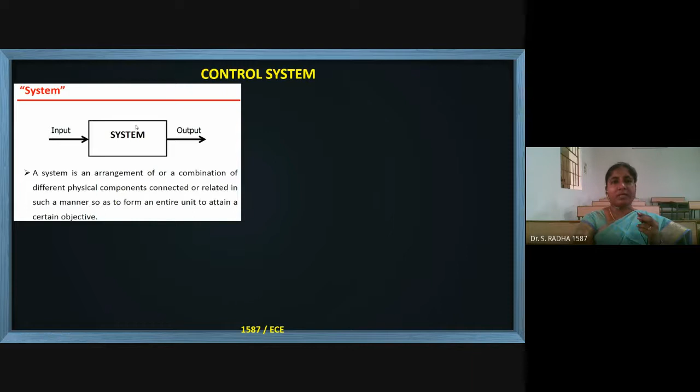System means, as discussed in the first class, a few components put together, joining them together to form a big equipment. Physical components connected together to form a bigger machine is called a system.

Input has other names: excitation signal, stimuli, or stimulus. Output is also called response.

If we see control, if we are regulating here in the system, input, output, system, all these things are there. When we call the system a control system, there should be some relation between input and output, and there is some control over the system. We operate the system in order to get some output. If that is done, then it is called a control system.

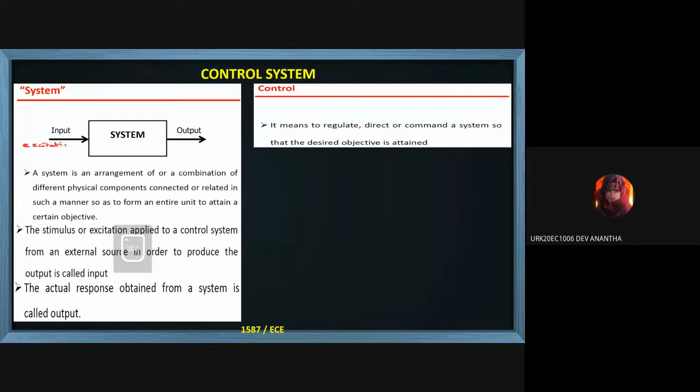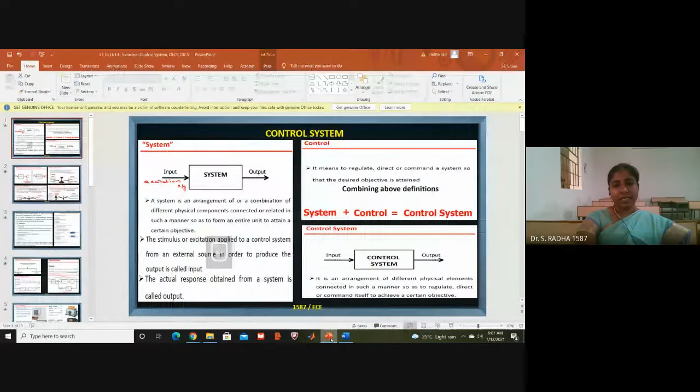The other name for input. Excuse me, ma'am, someone named Aminuddin is waiting outside, can you please allow him, ma'am? So here, no access for me. Kindly join with the Karunya mail ID and put your register number followed by name.

So the other name for input is excitation signal, and it is also called stimulus. Coming to the output, the other name is response.

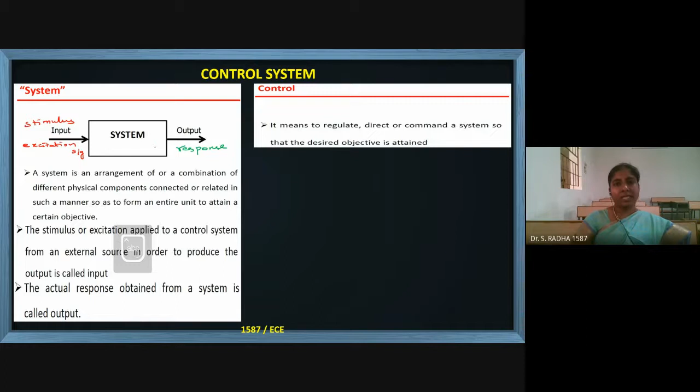If we regulate, if we do some control over this entire thing, input, output and system, controlling one and the other, then that phenomenon is called control. Combining the two, system and control, put together, it is called control system. It is an arrangement of physical elements where we regulate or command the system in order to achieve some objective.

We will have some objective, and for that purpose we will be monitoring or having control over the input and output. That is called a control system.

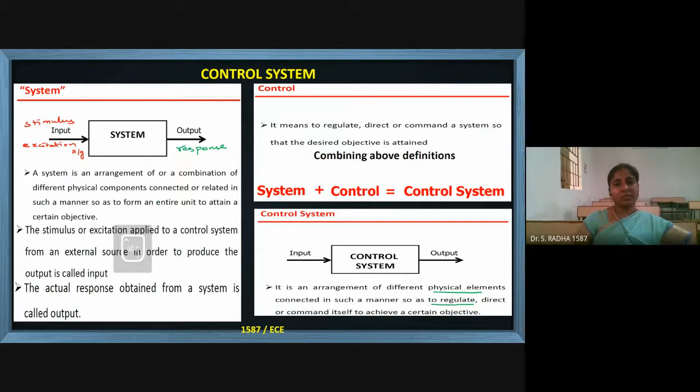Now coming to the difference between system and control system. A system will have some output, it may or may not be the desired output. So the system will give some proper output, but it may or may not be the desired output.

That is called a system. If the output is the desired output, then it is called a control system, because we are controlling, in order to achieve some objective, having some regulation over the input and the system to get the desired output, hence it is called a control system.

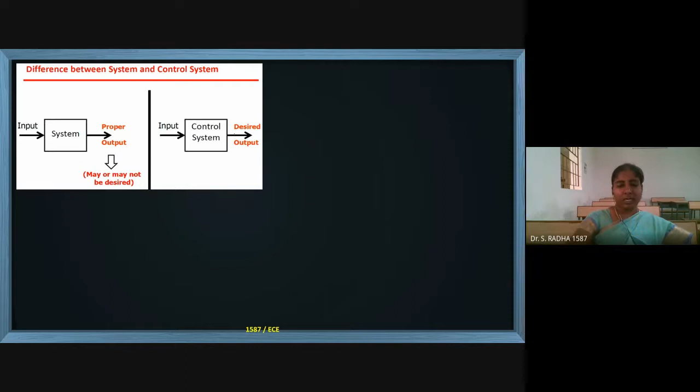If you see here, example: take a fan, and this fan is not having wings. In that case, our output is airflow. Without wings, there will not be airflow, and we are not getting either proper output or the desired output, and hence this cannot be called a system.

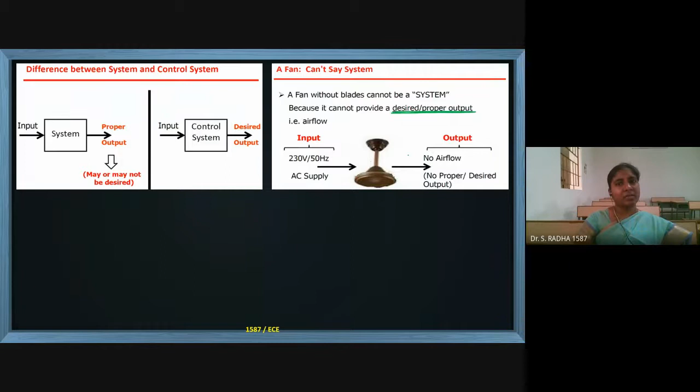There is a fan, but without wings there is no airflow, so it cannot be called a system because we are not getting either proper output or the desired output. Now take a fan with wings, like in the railway station, when you switch it on there will not be any control over the speed of the fan, since they might have fixed everything internally for a common setup particularly in railway stations.

Here, the fan is present with wings, but there is no regulator present. The fan is having blades, blades or wings are one and the same, but without a regulator. Regulator is to change the speed of the fan, switching from 1, 2, 3 up to 5; that regulator is not present here.

So the airflow is constant, constant speed, rotation of the wings, rotation of the blades. In this case, we are getting proper output, but particularly if we want to increase or decrease the airflow, that is not obtained. Desired output cannot be obtained.

In the second case, there are wings, but there is no regulator. Proper output is obtained, but it is not the desired output. In this case, it is called a system.

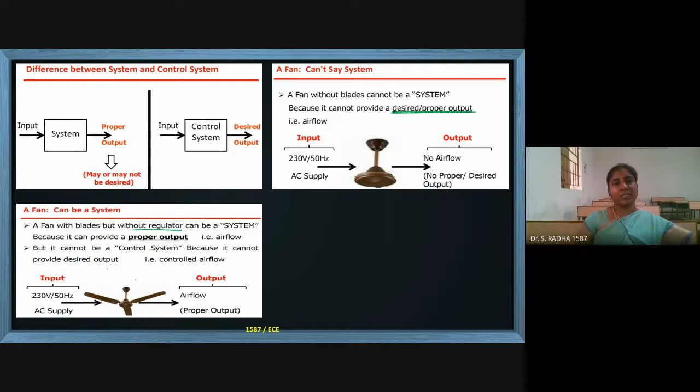Now, if you take the same fan with a regulator present, where we can change the points to increase or decrease the airflow speed or the speed of the wings, in that case regulator is also present, blades also present, desired output is obtained, and hence it is called a control system. We have seen three different cases: a fan without blades and without regulator, a fan with blades and without regulator.

Third case, we have a fan with blades and with regulator. These are the different cases in a system.

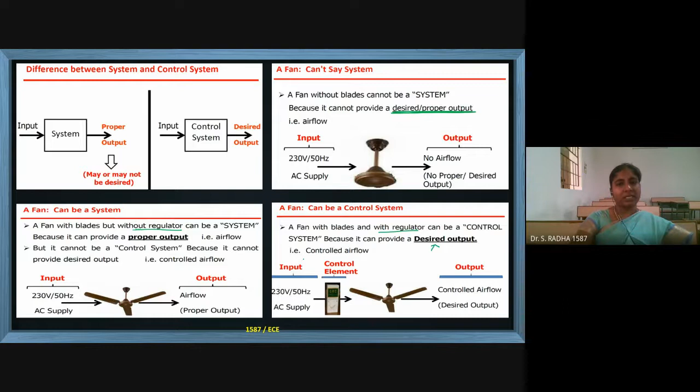And here, if you see, this control system plays a major role.

In many engineering and science applications, control system has a vital role. In industries, manufacturing uses numerical control, for example a wood cutting machine. It gives the length of the wood and at what point to cut. There will be a scale measured upon the wood, and at one particular point the wood will be cut. That is a numerical control system.

Machine tools, for example manufacturing a cot, chairs, or dining table, will have some measurement. Even our classroom tables have specific length and breadth, and the raw wood will not be the exact size, so it should be cut properly to design the required equipment. In that case, a scale is present and operated so the wood is correctly cut at the required positions. These things come under numerical control in industries.

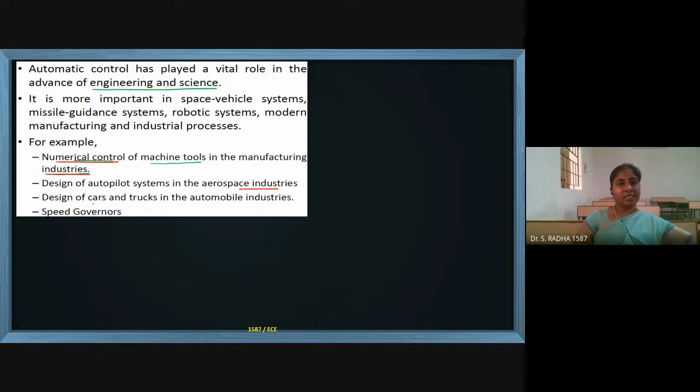Our first topic is industrial control system. These are some applications where control system is used in industries: aerospace industries, autopilot systems, and cars and trucks design in automobile industries. All these are different applications where control system is used in industries.

Some more industrial applications include pressure control, temperature control, and humidity, which means water level. Also viscosity and density. If you put oil or kerosene on water, it will float because the density of kerosene or oil is less compared to water, and that is related to the viscosity of different materials we use.

Then there is flow in the process industries. Flow control: for example, take toothpaste - the mouth of the toothpaste determines how much toothpaste we use. Similarly, flow control means liquid flow, and the size of the pipe in which liquid flows also comes under flow control. All these are industry related issues, and control system is used in all these different areas.

There are a variety of classifications in control system: natural control system, man-made control system, manual control system, and automatic control system. The universe and human body are natural, because they operate and produce a desired output naturally happening in the universe. Coming to man-made control system, vehicles and aeroplanes are examples.

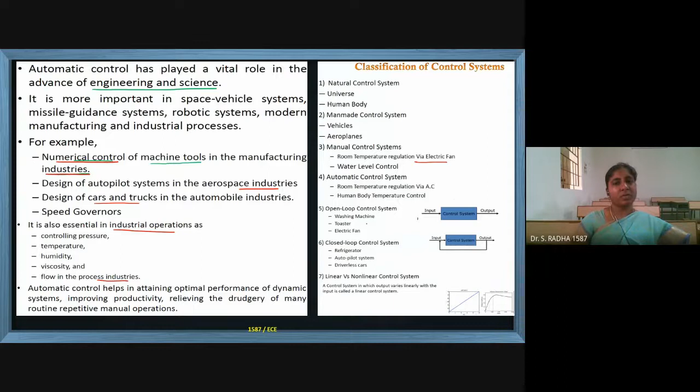There are different other types of control system: open loop and closed loop, which we will discuss in detail. Washing machine, toaster, bread toaster, and electric fan are all open loop. Refrigerator, autopilot, and driverless cars are closed loop control systems.

There are also linear and non-linear control systems. Here you can see the diagram, a straight line. As the x-axis value increases, an appropriate or proportional change occurs in the output on the y-axis. It is a 45 degree line, meaning whatever change happens on the x-axis, a similar change happens on the y-axis - this is called linear. Recall Ohm's law, V is proportional to I: whatever increase happens in current, a similar increase happens in voltage, and that is called the linear property of the resistor. Similarly, capacitor and inductor are also linear elements.

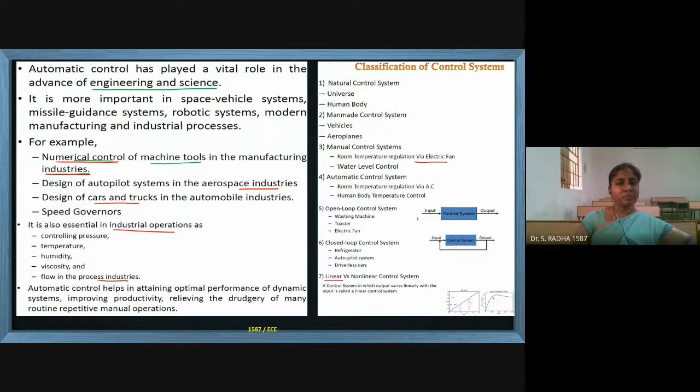Non-linear means this straight line graph will not come. This is a graph for RLC - resistor, capacitor, or inductor. If you draw a graph between voltage and current for a resistor, it will be a straight line as in the first case, hence it is called linear. Non-linear means a straight line will not come - any zigzag type of waveform is non-linear. This type of graph can be obtained in transistors, BJT transistors, or diodes, which also give a non-linear graph. So all these are non-linear control systems.

Now I will go with the next type of classifications.